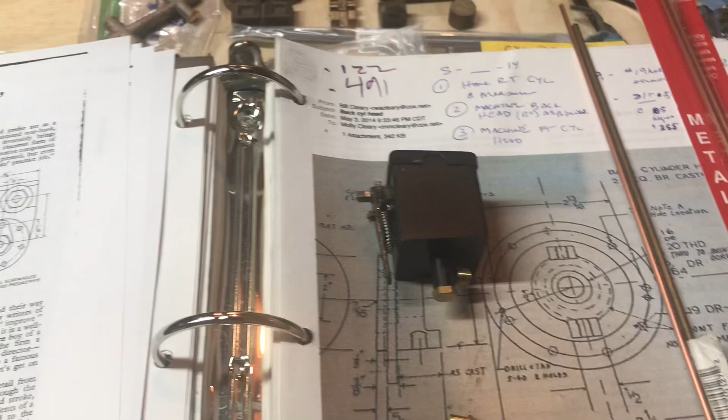Back on the Tich. I'll show a couple of little show and tell items before I get into this week's machining project.

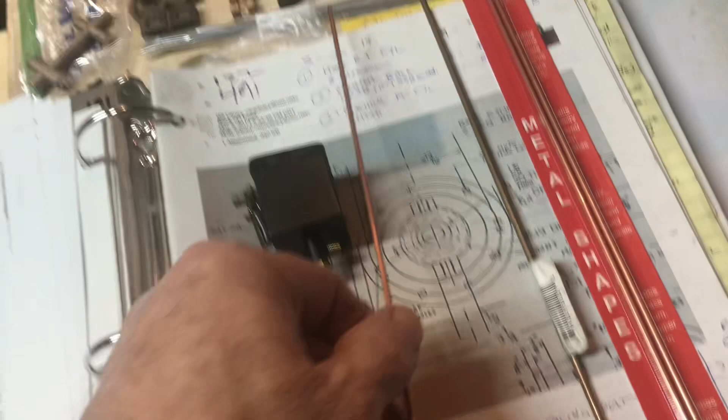First of all, I got some copper 3/32 inch copper tubing from my favorite Ace Hardware. I think this is like $1.50 for 3 pieces, because this is the size they call for the oiler, versus 1/8 inch, which is a little bit larger, as you can see here.

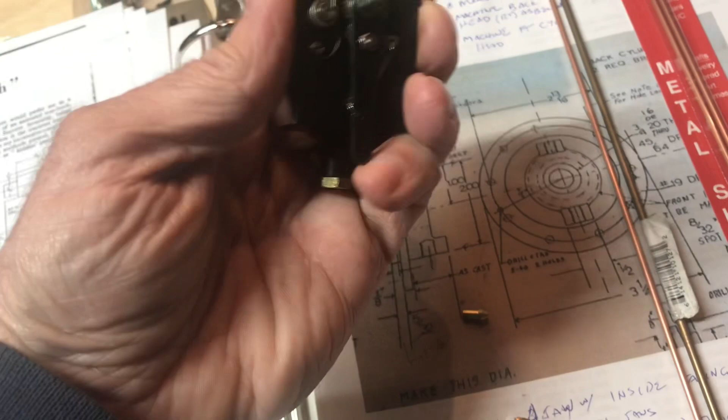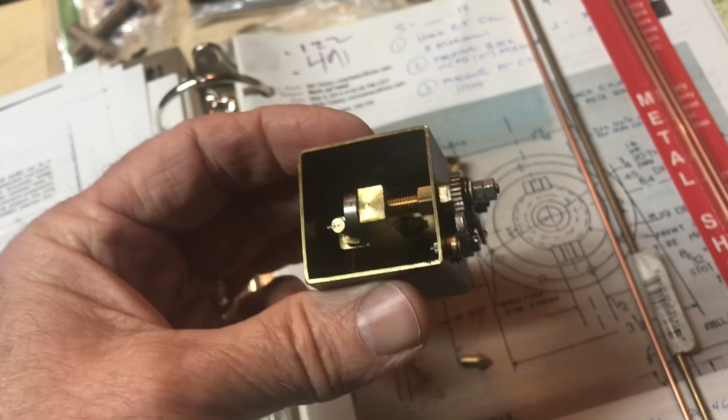But I wanted to show this cool thing too. This little oiler, I wasn't sure if I was going to make my own lubricator or be able to buy one, but this small one here is the right size for the Tich, I believe, and I just got it off eBay. A gentleman in Sweden was selling this, and it's a UK part, and I got it for a good price, so really excited about that.

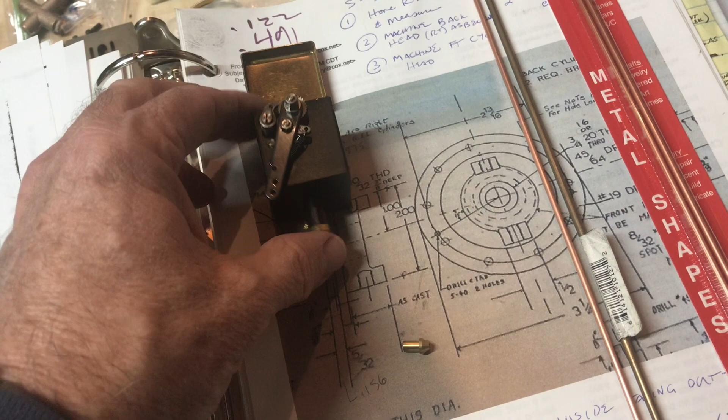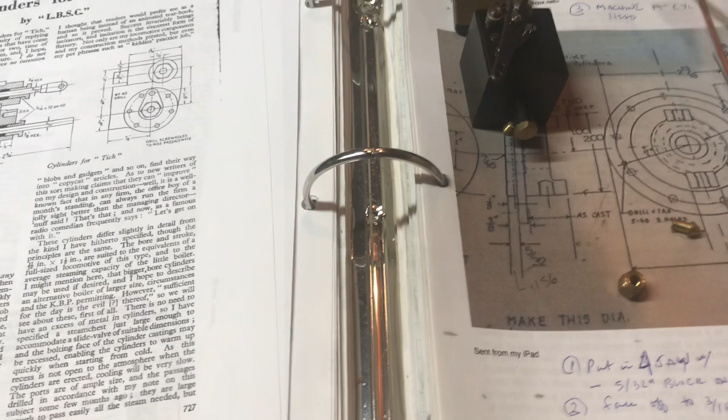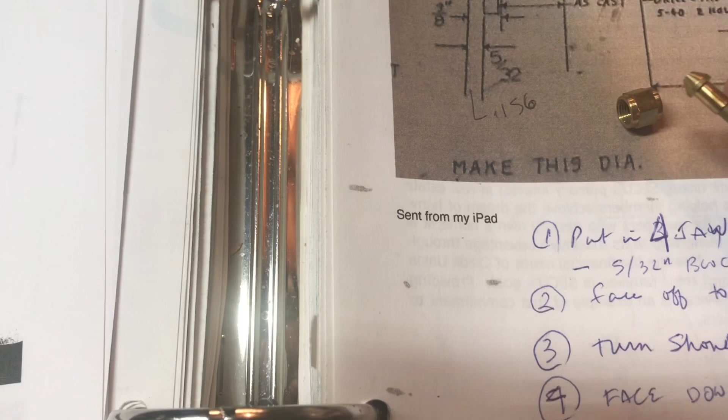This also illustrates a point. Here is the cone for the connection. There's a little sleeve around the cone, and then the nut fits on the back side of that. This shows you the difference between the ones I just made for the water pump and the conventional cone design. The conventional cone design has that long sleeve, so it's actually a larger piece of hardware that you end up using. Just thought I'd illustrate the difference between that and the plain cones I recently made.

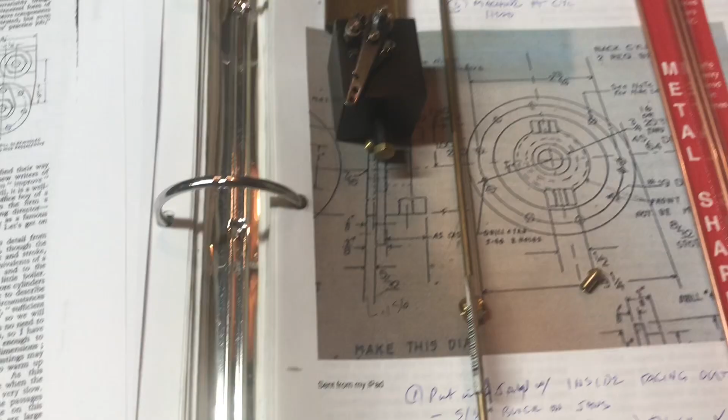The other thing is, you can see on the backdrop here, I pulled up my book to refresh my knowledge on working on cylinder covers. I wanted to see the notes I had about when I made them for the Allen Mogul, and compare them to how the instructions are for the Tich.

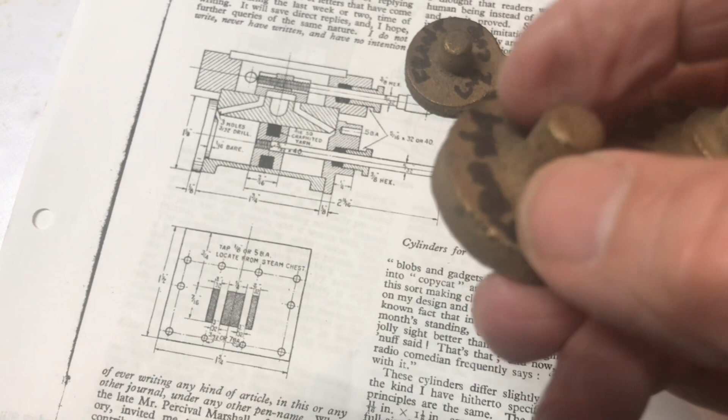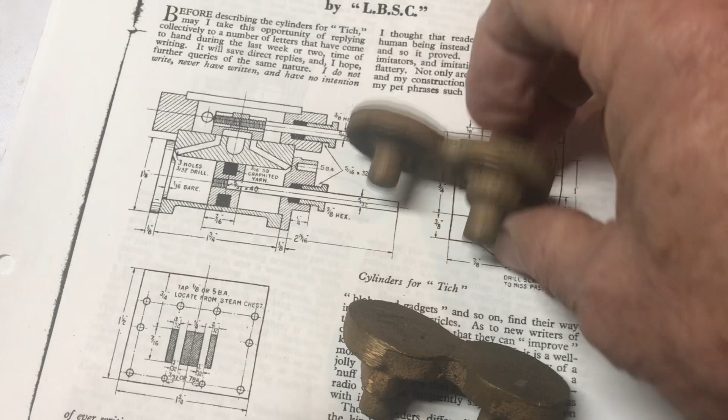Here's the front and rear cylinder covers. I'll have to cut the castings in half, and the plainer looking ones are for the front, and this part is just a gripping piece, so you can grip it in a 3-jaw and turn it. It's not too much rocket science there. The ones with the little stand cast into them are for the rear, and the valve guide will attach to the extra part there. So I'll be working on those this week and bring you along for that process.

Alright, before I cut the cover castings apart, I thought I'd do a quick segment showing, I already explained what they are, the front and the rear castings.

Here's the cylinders. These are the steam chests that came with the set, and they'll be arranged like this. Steam inlet will come in through this port, that's the center slot there, and then the valves push or let the steam go to the front or the rear to give the locomotive the operation.

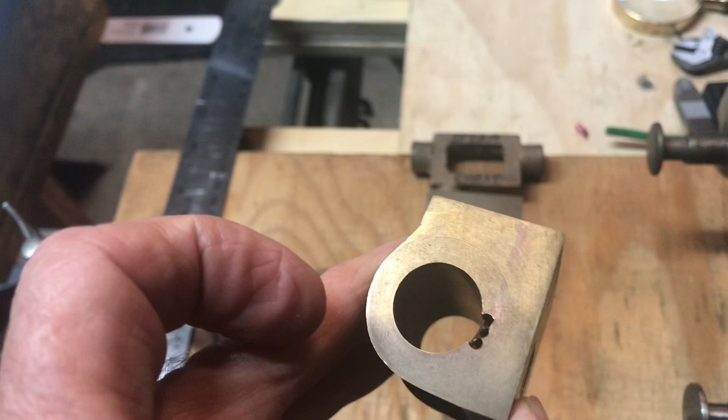One thing before I start any of the machining on those, I do need to file a recess to smooth out where these holes are. So I'm going to do that.

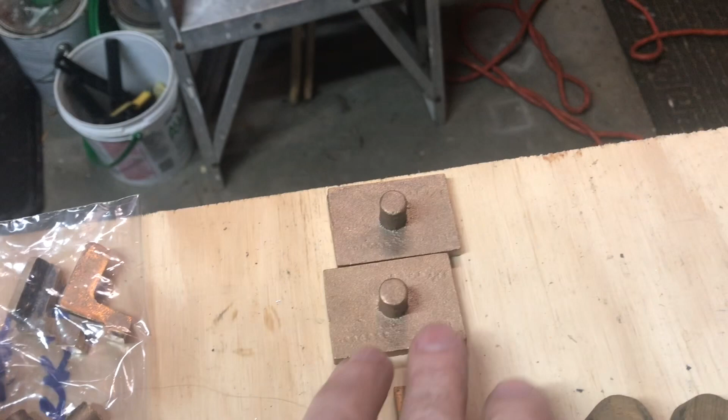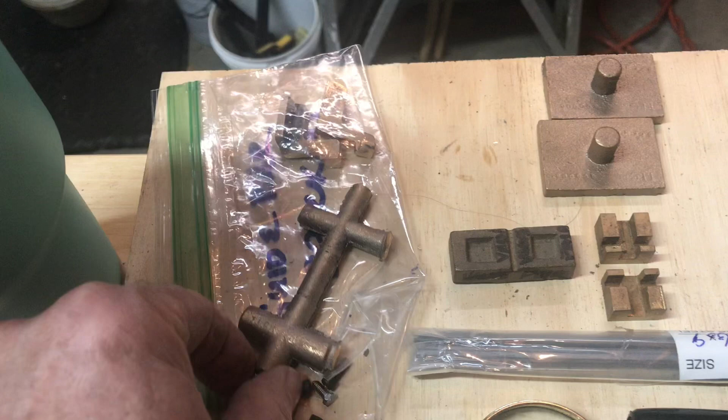There's the cylinder covers that I bought, they were not included in the original set. Here's some pistons, some additional slide valves, and slide valve blanks, and these are the piston blanks, so they all have to be machined. And here's some 5/32 inch stainless steel rod that I can use for the valve rods and piston rods, and a steam tee that I can use for connecting the two sides together.

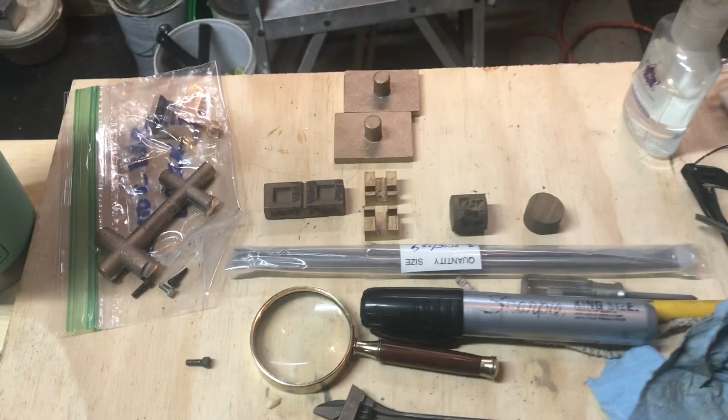So there's a steam tee and a lubricator tee, and this doesn't look like much, but this will be, who knows, a month or two of happy, fun machining time making all these parts, even though the cylinders are already machined, and it looks like they did a really nice job. So I'll bring along as we go.

Okay, here we go, the cylinder covers have been cut with the bandsaw.

I use my little Harbor Freight bandsaw over there for everything. I cut the pieces and then use the belt sander to round them up a little bit and clean off some of the flash, just to make it easier to turn them in the lathe. Here's the two front ones I'll be attacking tonight, and the two rear ones that cleaned up really nice. There's plenty of extra material ready to go, so off we go.

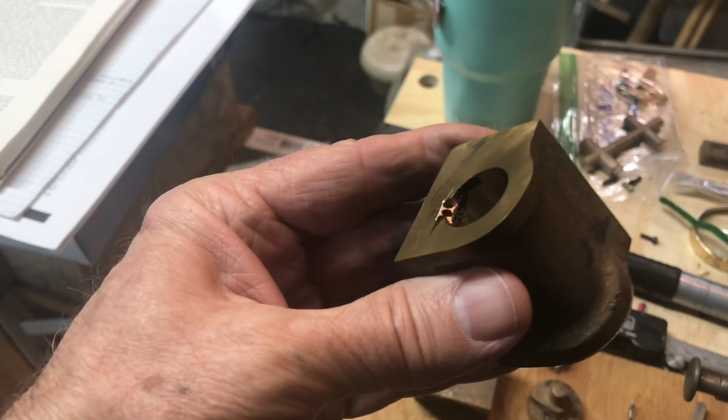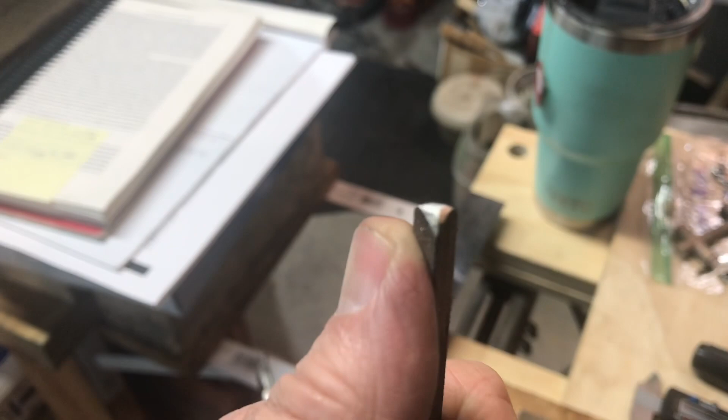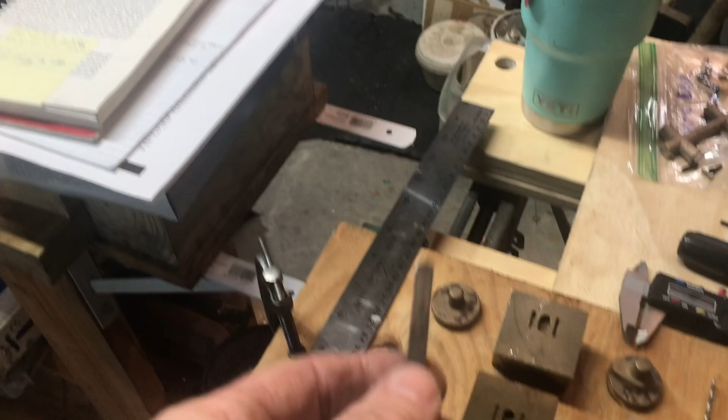One more thing I wanted to show before I do the covers is I used a file to file a little relief for the steam passages, and I did that on purpose. Let me show you the file I used - an old triangular file that I've carefully rounded the end of, because you don't want a file stabbing in and scoring up the inside of your cylinder. It was about the perfect size for filing the little 3/32 inch 45-degree angle for the steam passages, so the steam can go into the cylinders.

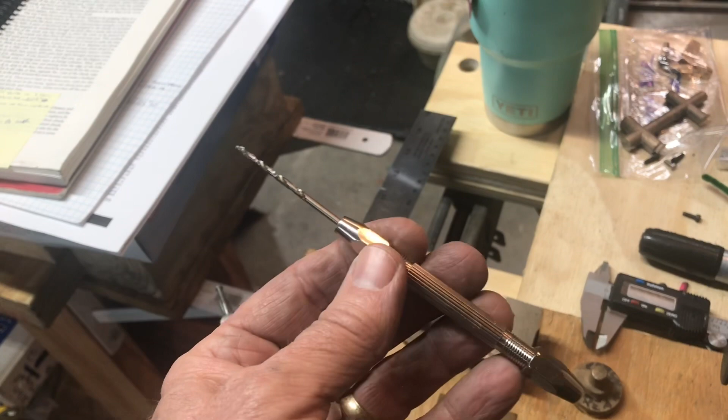The file does distort the cylinders a little bit, so I used a pin vise with a 3/32 inch drill in it to just twist through and clear out the passages. Pretty handy to have - if you don't have one of these pin vises for holding a drill, you might want to get one.

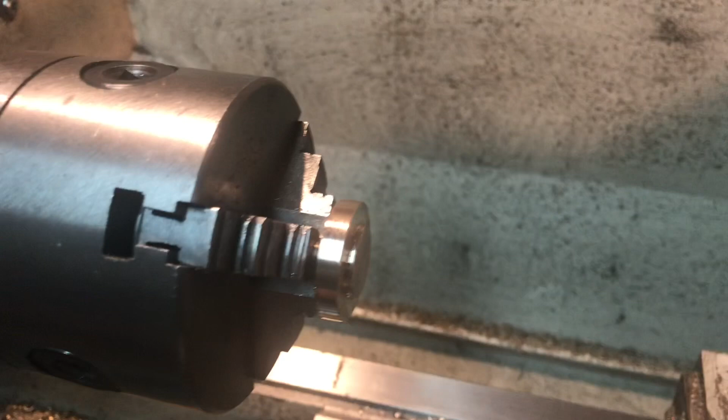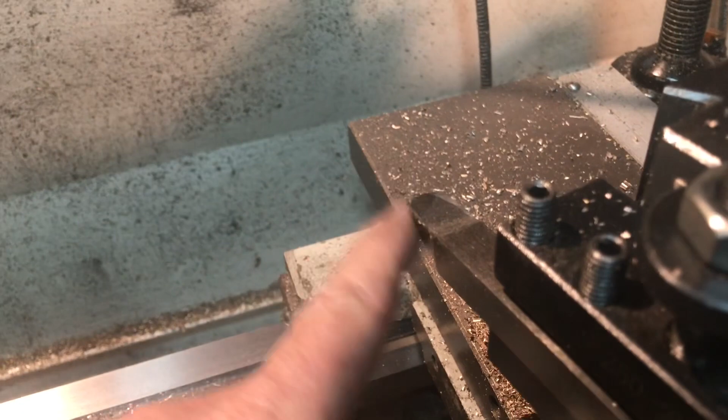Here's the second of the end caps, with the little 1/16 of an inch register, and then the outside diameter turned to 1 1/8 inches. I'll say with the high-speed steel, I experimented around a little bit, and the round nose high-speed steel tool worked great for removing the most metal.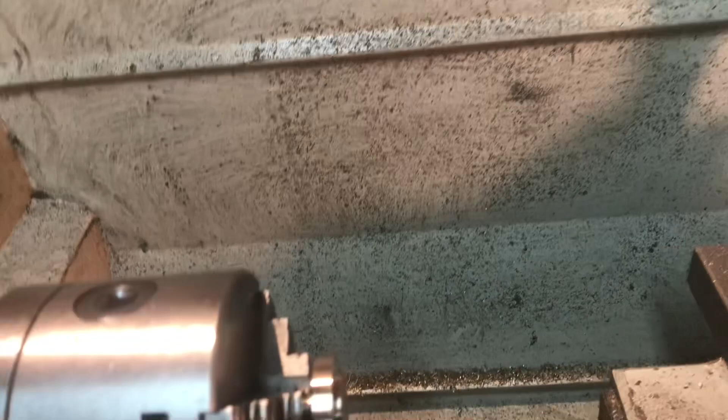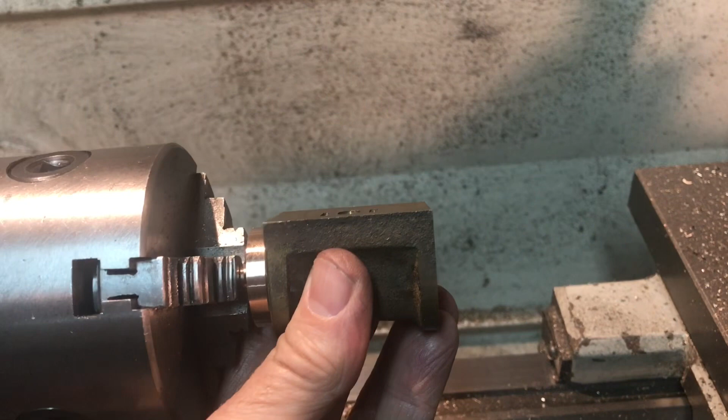Then what I ended up doing to get the undercut, I used my homemade smaller cutoff tool. I put it in at an angle like this and just went in a couple thou just to give me the little undercut there, so I have a pretty good fit on the cylinders. It's not perfect - honestly it's a little looser than I wanted, maybe a thou or so, but it'll be fine. I'm generally pleased with how that came out.

Time to do phase 2 tomorrow.

Last night I started making this special holder that will hold these end covers around this 1 1/8 inch diameter that I'm tapping with my thumb. It's just a piece of steel that I turned down to exactly 1 inch so I could use it in a 5C collet chuck in the mill for holding these to drill the holes in them.

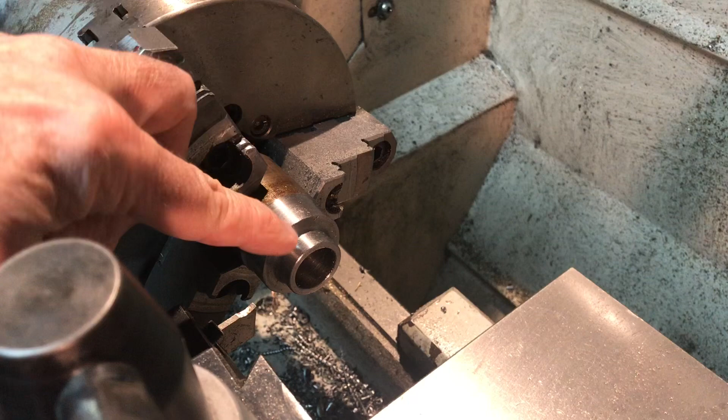This part I turned down to 1.5 inches exactly, and then drilled it out 3/4 of an inch. So the center is already drilled out larger than these registers are, so that once I part it off, which will be the next operation, I can flip it around, grip it by this part, and then open that side up so it's exactly 1 1/8 inches, making a nice clamping action on the outside diameter of these end covers.

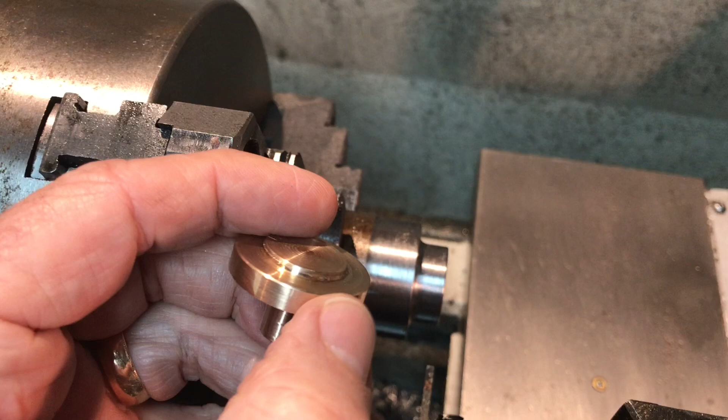Here's one of the front cylinder covers from my Allen Mogul, and I'm showing this because there's a little design in it, and I'm going to do the same thing for the ones on the Titch. You can also notice the gap here - that's because of the space for the steam holes.

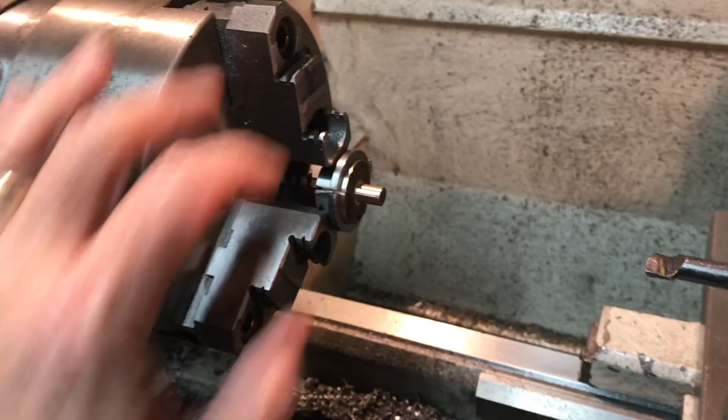Here's the collapsing vise, if you will - the collapsing jaw for the end caps. This is one that I need to cut the end off, then face it, and then put that little design in it. You can see how much smaller they are by comparison. I didn't shoot any footage of it, but I used a boring tool to cut out the gap inside, then took it out, marked where it was, and sawed it so it would collapse and pinch down to hold that.

Alright, one complete. I just put a little, like a 20/1000 of an inch dish in there to give it a little bit of a design.

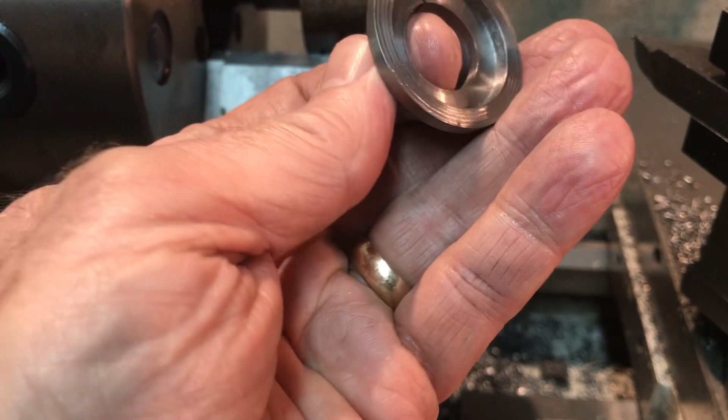Just kind of eyeballed it. Although the first rear cover, or front cover, came out okay using this device, I'm actually remaking it. The main reason is that little radius or fillet between the 1 inch part and the 1.5 inch part would be fine for the 3-jaw chuck since there's a radius on the jaws. However, it was hard to get clamped in there, and when I'd tighten it, it would move a little, causing some run out on the part. I'm glad I got a chance to test this with one of the rear or front covers, since they're a little less critical, as long as they seal, that's the main thing.

So I'm remaking it, and this time instead of using an all-the-way rounded tool, I'm using a sharper point tool with a sharp edge. I think I'll get a much flatter clamp against the 3-jaw. I'm also going to make the interior tolerances a little tighter than before. We'll see how it goes.

The point is, if I'm going to use this method for machining the rear covers, remember those hold the packing gland and piston rod and all that, so you want to be really accurate there. The other big difference for this second one is that after forming the outside, I checked and made sure the 1-inch diameter fit perfectly on one of my 5C collet chucks for future purposes.

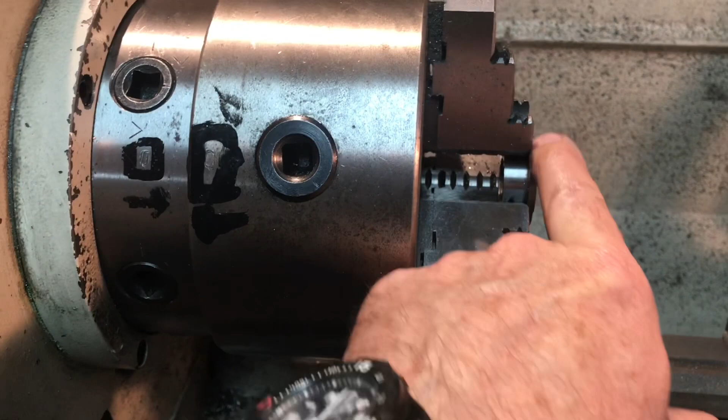Alright, here's the second one, and after I cut it off, I placed it in here. The fit is great, it's flush against the jaws of the 3-jaw, and I'm very glad I bored it out, or drilled it out undersized, and used my boring tool.

Got a nice carbide one here, and bored it out just to the inner register size on these end caps, then bored it out larger, only 3/32 inch deep, and got a nice shake-free fit here. It's super tight, and I can feel it making contact in both the inner and outer register.

So I didn't get the outer surface finish, I should have made it a little thicker before cutting it off, but that's okay, it's just appearances. So I smoothed it with a file. I'm going to mark it, take it out, and cut it now with a hacksaw, and it should come out very nice.

Okay, here's the second front piece chucked up and ready to machine. Let me just show you, you can see a little run out with this, but that's the uneven cast surface. The stem, so to speak, is running very, very true.

So I'm very happy, even though it took an extra hour to make that second edition with the sharper edges. When you go to make yours, you can learn from my mistake and just make it that way.

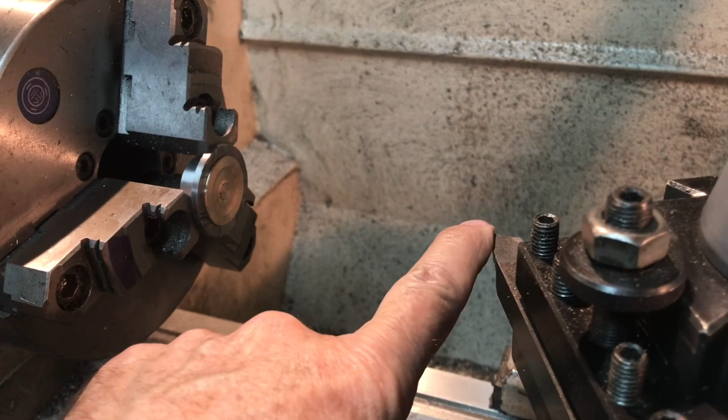Okay, the second one came out really nice, I just finished machining it. I put the round nose tool back in. Let me pop this thing out and then show you both of them in the cylinders. Here's both the finished front ones in the cylinders.

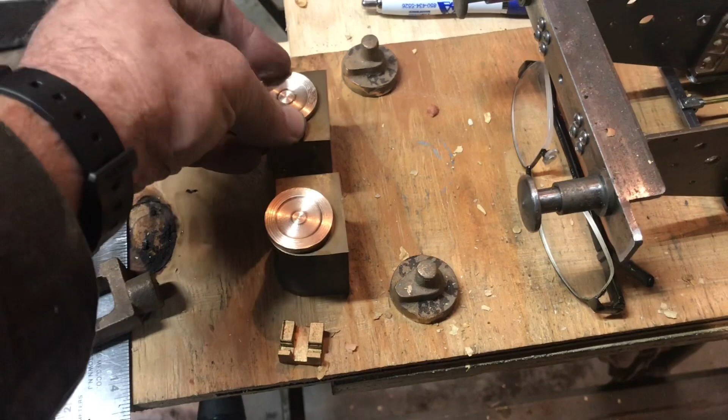Got a nice fit with the register, and really happy that I went ahead and made the better fixture to hold these, because that'll be very important when I machine the rear ends. The rear valve covers, the rear piston covers are held the same way.

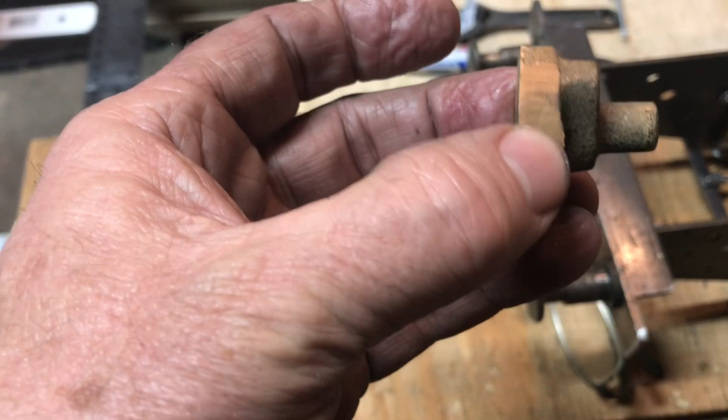They're machined basically the same way that, according to the book, you grab this part, the little stem, and the 3-jaw, machine it flat, machine the register, machine the outer diameter, and then you flip it around and hold it in place like this, and cut the stub off, and then drill and tap this area for the piston rod and the gland. Okay, here we are.

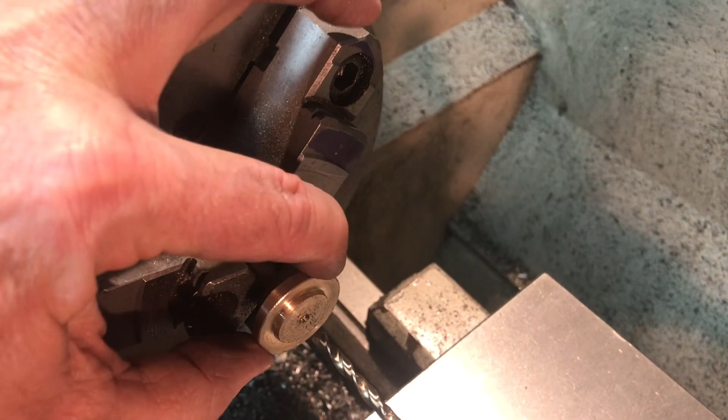I've turned the register and thinned the outer edge to about 1/8 of an inch. There was a lot of material to remove to get it to this size, and I've got that outer diameter to 1.125 inches, or 1 1/8 inches, and it's a nice fit on my step chuck that I made yesterday, the second one.

So getting ready to drill the number 21 drill, 1/2 inch deep, and then this one will be done on this side anyway, and I can do the other one just like it, and then reverse them both in the step chuck.

Okay, here we go with the second one almost done. I did chamfer this a little bit, using an ordinary countersink. Got it smooth there. Looks a little dirty because of the cutting fluid, but the important point is getting the fit right.

I really played around with it and ended up having to use the cutoff tool again for the little undercut, and I came in straight at this angle with my top slide to give it that undercut so it fits good there on the side.

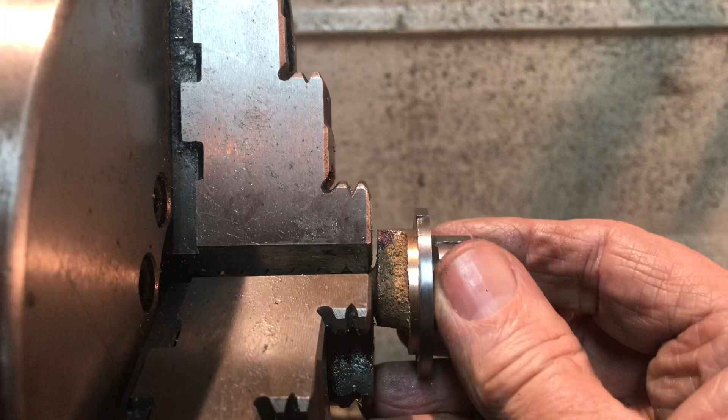Another comment, it's nice to have the little step jaw. You can check your fit there, so it's nice for confirmation that you have a nice snug fit on your part. Alright, here we go with the right hand side rear piece.

You can see how thin it is. There's 3/32 of an inch of material inside the step jaw, and I've carefully set this up. I tapped it with my little hammer, held it in place while I tightened the jaws, and then went around and tightened all three places to make sure it's nice and secure. I've given it a good wiggle test because if it's going to come loose, you want it to come loose now before you start working on it.

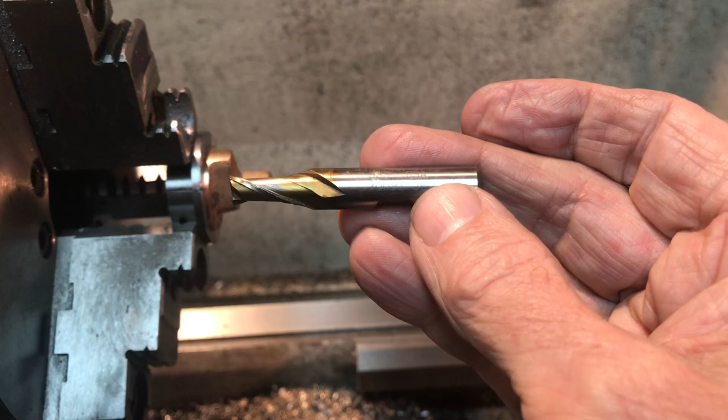The book talks about a pin drill. Happily, I happen to have, it's an unusual size, but I actually have a 9/32 inch end mill. So I'm going to use that to make the tapping size hole for the 5/16 inch by 32 threads. And then we'll tap it and clean it up, file, deburr, and do the other one.

That went pretty smooth. I used the same high-speed steel cutoff tool with a pretty pointy end and got it down to 282 sticking out. Now all we have to do is drill that center part out and tap it. So here I am using the end mill as a pin drill.

0, 100 thou, 150, going for 5/16, clean it off. 0, 1, 2. I'll probably do this all at once. I just like to take it easy since it's the step jaw and everything. 0,

Using my tailstock, it's got a pretty accurate indicator there. So now all we have to do is tap. The 5/16 32 is the thread I'm going to use.

Alright, after using the pin drill / end mill to do the final tap hole, I used my 5/16 inch by 32 bottoming tap here. I have a complete set, all the different sizes, but I decided to just go ahead and use the bottoming tap since this is soft stuff. The goo you see on there is the tap paste stuff that I really like. So I've tapped it once by hand.

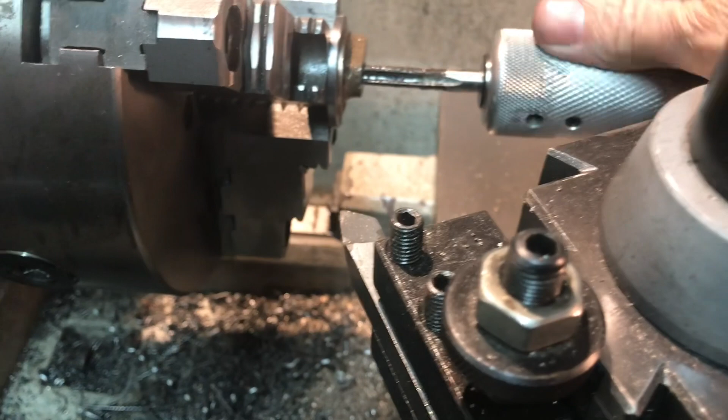I'll run it through one more time to make sure I get all the threads cut all the way to the bottom, but I'm not doing the machine tap, is what I wanted to point out. There's only about a 1/16 of material between the bottom of the tap space and the wide open spaces going into the piston, so you don't want to deform that material. I'm just tapping it enough, holding it like this, and I'll file and clean it all up. That'll be it for this one, and I'll repeat for the other one.

The only other thing to do, eventually we'll have to make a center plug, then mark, drill and tap a number 5-40 hole on the top of both of them. I'm thinking about doing that in the mill, and I'll show you about that.

One more thing - I had it in the chuck there, holding so nice, and you can see the part looks pretty good. You can see the threads in there, I put a chamfer in, ran the number 21 drill through, and ran the tap through one more time. While I had it nicely supported, I took my assortment of files - let me grab them and hold them up here - and used all these to clean it up a little bit more while it's being held like that.

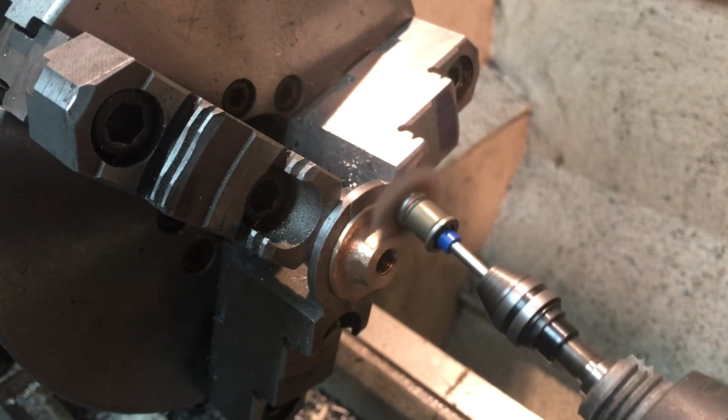The last thing I'm doing right now - hold your ears if you're on earphones - is using one of the coarse buffing wheels in my Dremel, going after it to get any grit, crud, and deburring a little bit, just getting them cleaned up. Pretty handy, gets that done.

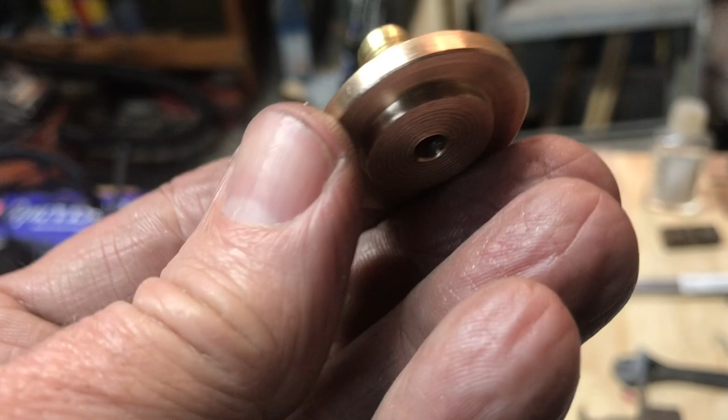Okay, this came out pretty well. Here's the two finished, well, semi-finished rear blocks. I made a little 5/16-32 plug to go inside there, and there was a little center mark in there, so I'll be able to put this inside a collet block in the mill, offset 5/16 of an inch, and drill and tap a number 5-40 hole at the center of each of these gland boxes. I'll show you what the inside looks like.

You can see the 5/16-32 threaded portion, and there'll be some graphited yarn and then a packing nut that will go on top of that, with a hole in it of course for the piston rod. So I'll bring you back - we'll work on drilling and tapping the 5-40 pieces tonight.

Closing in on the final stages of the rear covers. I've got this thing in my step chuck, in a 5C collet, a 1-inch collet, and my collet block in the mill. I've carefully lined up the zero point in the little turned plug, and made my zero-zero on my DRO. So now all I have to do is offset that 7/16, drill number 38, and tap the 5-40.

Start with a little center drill, go to a 1/4 inch depth. There we go, the number 38 drill. And tap by hand, number 5-40. I've got my bottoming tap in here - this is one of the good taps I bought years ago from McMaster Carr. It's looking good - one done, one to go.

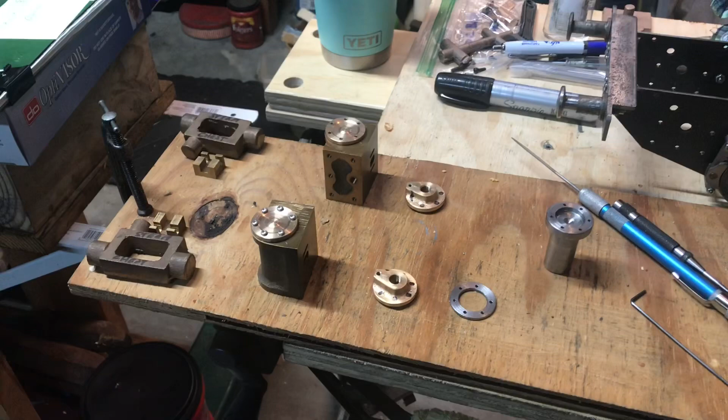Hi folks, I'm still working on the LBSC TICH, on the cylinders and the cylinder covers. As you can see here, I've gotten pretty far. I just stopped and added it up today - I was trying to do this all in one video, but I've actually got over 20 minutes of footage just on machining the covers themselves, not counting all the stuff about the bolt circle and drilling the holes.

So what I think I'll do is make this the intro for the first part, just talking about machining the cylinder covers, and I'll do another segment, published later on, probably this weekend or early next week, whenever I finish the bolt holes in the back cylinders and get all that done.